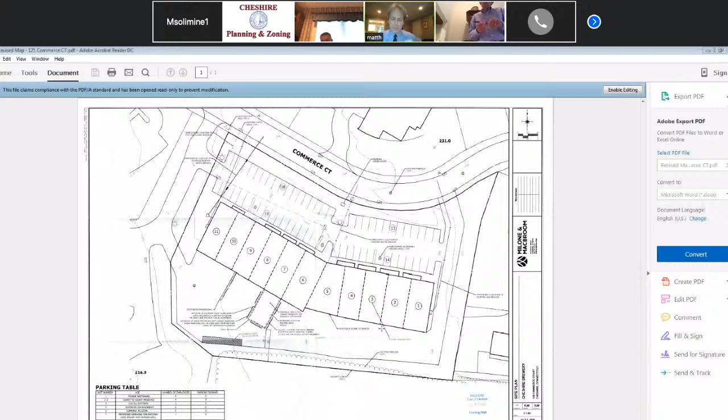In other words, our parking demand will be more focused on the hours of 2 to 10, generally on weekends, and then later on weeknights. So it's not anticipated that we're going to have much conflicting parking demand concerns at the premises.

That being said, we've sought to work with Mike Kozlowski and CFD, as well as staff, to accommodate any concerns with respect to the location of the food truck and the access to the rear of those neighboring units, while keeping the patrons in an appropriately safe location to the rear of the unit itself. So with that, it's probably a good time to have Ryan walk through the site plan, which is not very complicated, and make ourselves available for any questions the commission may have.

Thank you, Matt. Can everybody hear me? Okay, thank you. For the record, my name is Ryan McAvoy. I'm a licensed professional engineer with Milone & MacBroom.

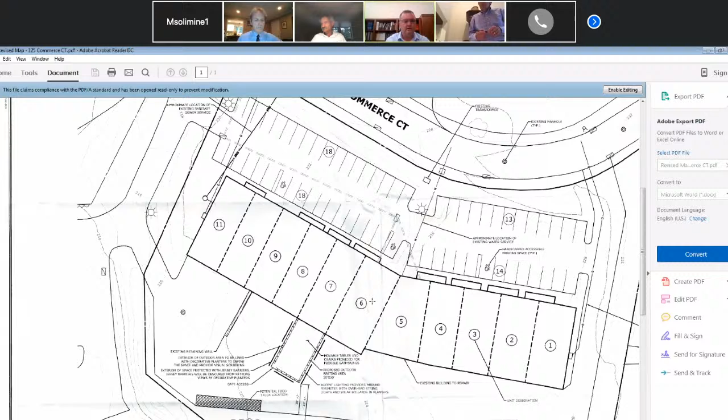Very briefly, the site plan that you have in front of you — essentially the goal is to maintain and use the existing parking area in the front of the building. This particular building on the south side of Commerce Court, just off of Highland Ave, contains 11 units, most of which are occupied right now by industrial or quasi-industrial office space. On our site plan, we provided a parking table demonstrating the parking demand for the other uses within the building currently, and we also calculated the demand for parking for the brewery, assuming the requirements of a restaurant. This may not exactly meet the definition of a restaurant, but it's the closest category in the zoning regulations that we can apply to this site.

The unit that they're looking to occupy is number 7, located in the western portion of the property. The indoor space will be approximately 1,200 square feet of indoor seating area, and the remainder of the space will be dedicated to the brewing operation.

The outdoor seating area, shown to the rear of the building, is approximately 30 feet by 50 feet in size, which will leave substantial space to the rear of the seating area for vehicular travel — some 28 feet in width. It will not obstruct the ability for any box trucks or similar vehicles to circulate around the back of the parking lot or make deliveries to the respective units.

The area will be protected with Jersey barriers on the exterior and mobile planter units on the inside, with gated access out to the food truck area. The food truck area is shown just as an example of where the food trucks can go. We do not want to encourage the food trucks to be in the parking area so that there's no conflict with this business and their patrons or other businesses.

The food truck area is completely mobile — these will all be vehicles. The outdoor seating area will have essentially no permanent site improvements associated with it. Things can be relocated or shifted very quickly if need be, but it is designed in a manner to provide safety from any vehicles that may be in the back of that building during patron use, although we don't anticipate that's going to be a very frequent occurrence.

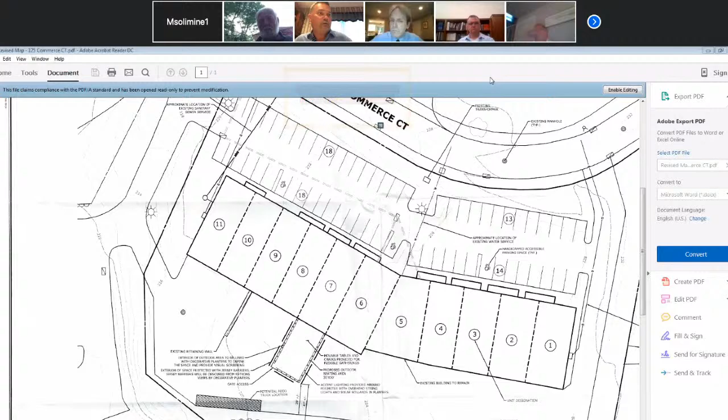Moving on, number 2, special permit application of Brodash Copper Ridge LLC, accessory apartment. The special permit application of Brodash Copper Ridge LLC, care of Anthony J. Fazzone Esquire, Fazzone Ryan and Ricciuti LLC, 2 Town Center, Cheshire, Connecticut, to establish an accessory apartment at property located at 11 Copper Valley Court, Cheshire, Connecticut, as shown on Assessor's Map number 29, lot number 151, in an R40 zone. Packet information is available on the town website homepage under Documents Distributed or Displayed during virtual meetings.

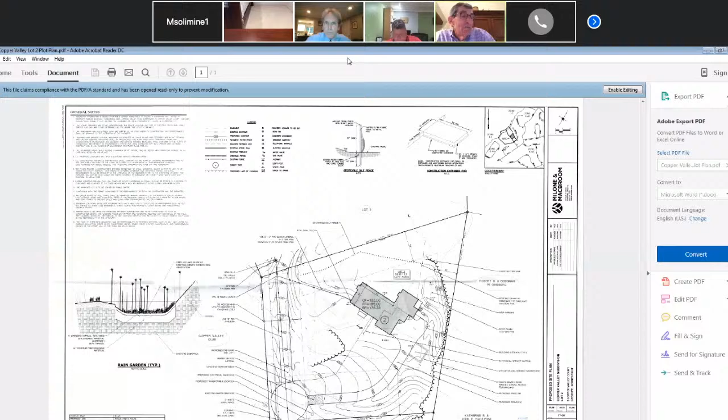Thank you. And representing the applicant tonight? Yes, Anthony Fazzone, with office here in Cheshire. I think the staff report pretty much summarizes this whole application. This is new construction, so it's very easy for the applicant to comply with the regulations. In fact, this is basically for a single parent, one of the owners' individual parent, and it's only 600 square feet. It has two private entrances and is connected to the rest of the house. As Mr. Voelker's memo points out, it complies in all respects to the accessory apartment section of the regulations.

Okay, thank you. Any questions or comments from commission members on this application? Woody Dawson: pretty self-explanatory, yeah, this is a pretty good one. Chairman, if I may, I do have to read comments into the record.

This is dated July 2nd, 2020, 11 Copper Valley Court. The fire department has reviewed the above application for the planning and zoning process. We recommend the following common stipulations: if this application is approved, code compliance plans must be submitted to the building official and fire marshal's office prior to construction. And one, a fire alarm system shall be installed so that occupants of both dwelling units are notified of a smoke or fire condition in the other. That's it, Mr. Chairman, no other comments.

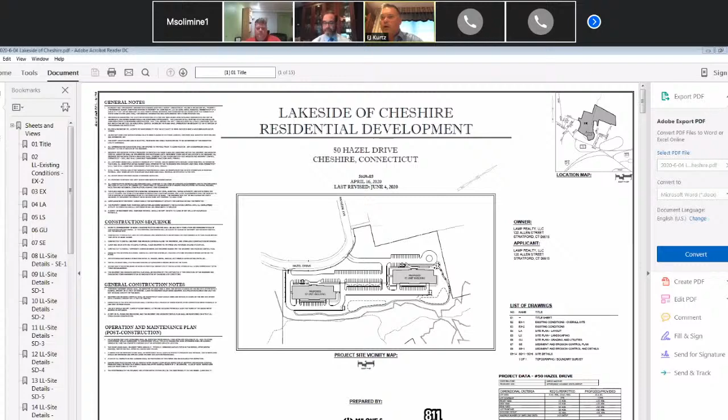Okay, Mr. Williams, you're all set. Thank you. Good evening, Mr. Chairman and commission members. I just want to start off saying, Mr. Chairman, I agree with what you said at the outset. I and my team would all like to be with you all in person as well. We appreciate you conducting the hearing in this fashion, and everything I've seen the town of Cheshire doing in wetlands and zoning has complied completely with the governor's executive orders. So we thank you for that. My name is Joe Williams.

I am a land use and environmental attorney of 25 years with the law firm of Shipman and Goodwin on Church Street in New Haven, and I am pleased to be presenting these applications to you this evening. With me on the call, and who you will hear from, are Tony Nazardo, a representative of the applicant and owner, Lamp Realty LLC, Ryan McAvoy, who you saw earlier and know well, our civil engineer with Milone and MacBroom, John Pruitt, our architect, and Dave Sullivan, our traffic engineer with Milone and MacBroom.

We're bringing these applications forward in an effort to work with this commission to implement the vision you established in your affordable housing regulation a year ago, to create more housing in the town of Cheshire affordable to moderate income households, and make a positive enhancement to the housing stock in Cheshire. We believe our Lakeside of Cheshire proposal at 50 Hazel Drive will do exactly that. First thing I'd like to do, Mr. Chairman, is turn it over to Tony Nazardo to introduce himself to the commission, give you the perspective of the owner and developer and his vision for the development, and then I'll come back with more of an overview on the application.

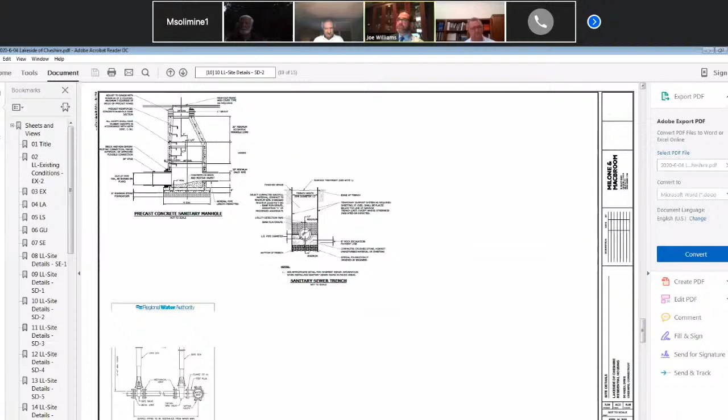Bill, there's one, there's 3 of them listed in a row. There was the existing conditions and the landscaping. Yeah, and the grading. Sure I have it, yeah, okay, but I'm not sure I have it ready to post up, so. Okay, well you can just go to the landscaping sheet, sheet 4 in the set. One more down. Yes. One more down. Right there. One more down, hold on. No, one more down. That, okay.

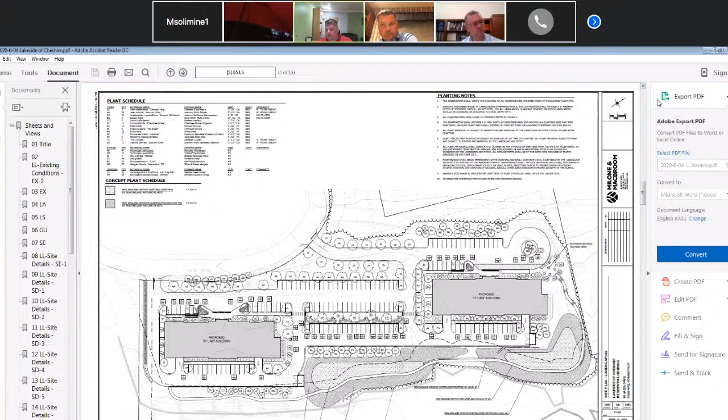We had this argument, we had a lot of discussions on it last year, and it passed unanimously for the 2 parking spaces. Well, I think there's a distinction, perhaps I would argue, between what is required by zoning in terms of the parking spaces provided and the discretion that's afforded to you for deferred parking spaces.

Now, deferred parking spaces - we're not suggesting that they would never be built. We're suggesting that, in general and based on data, based on the unit matrix we have of primarily studios and 1-bedroom apartments, that a ratio of 1.6 per unit would be more than adequate for what we need on the site. Should that not be the case 5, 10, 15 years down the road, and there is an issue with parking, those spaces could be built in a fairly straightforward manner.

But what we're trying to do is limit, I would suggest based on the data we have, unnecessary parking spaces - spaces that we don't believe are necessary to support the development in a reasonable way. We're not suggesting we don't have to do them if there were an issue. It's the whole purpose of the deferred parking spaces, to show how it could be built, which I believe we've done, but demonstrate that perhaps they're not necessary at this time.

Again, I think we'll agree to disagree on that one. When we passed the regulations recently, last year, it passed unanimously because of the conditions and other developments in town.

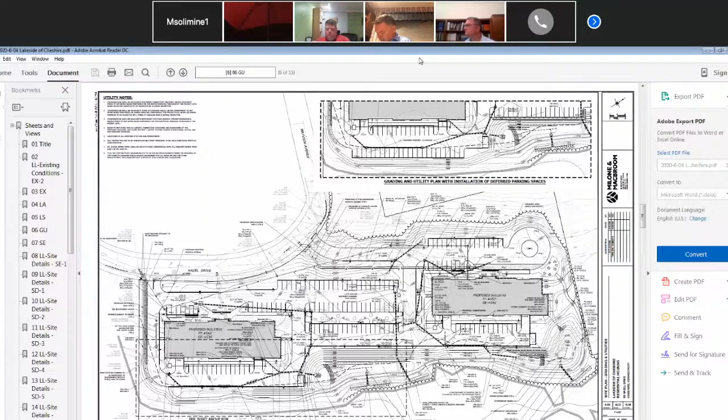Do you have an architectural rendering of the building? I couldn't find one, but that's actually the next portion of our presentation. It is available - if anybody wants to look at it, it's on the town website under documents available for the virtual meetings. Under Planning and Zoning Commission and the 50 Hazel Drive heading, there are architectural plans listed. If you click on that, you'll see the most up-to-date rendering we've submitted. We also included some in our package.

Thank you. Any other questions for Ryan? Okay, John Pruitt, the architect, now. Are we ready? Can everybody hear me? Yes, we can. For the record, my name is John Pruitt. I am the owner and principal of John Pruitt Jr. AIA Architect. My firm is located in Guilford, Connecticut.

We have in front of us a proposal to construct 2 identical buildings. Each building is 3 to 4 stories in height. The west facade, facing Hazel Drive, is 3 stories. The buildings are built into the site, and the rear perspective shows a 4-story elevation.

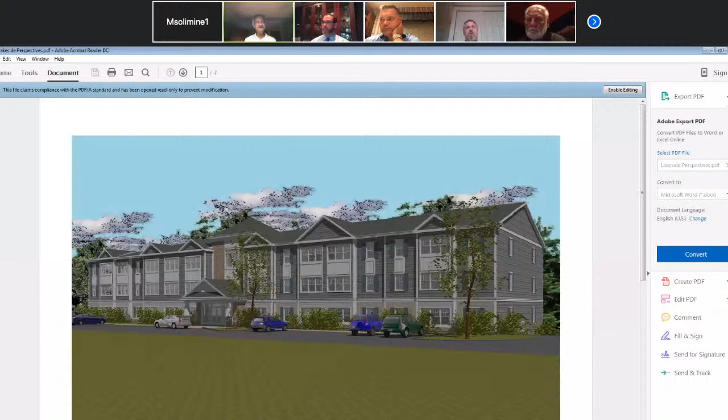My question is on the fully enclosed garage, is there any kind of ventilation that's running 24/7 or not for carbon monoxide and other exhaust fumes down there? Code does require both mechanical and natural ventilation. The rear perspective and the rear elevation shows ventilation, but because the garage is fully enclosed, we have to provide mechanical ventilation. And this will show on the mechanical drawings that we submit to the building department.

Thank you. EJ, Mr. Bowman.

Ryan McAvoy said that the new building's approximately 6,000 square feet of roof area less than the original drawings, but that was a flat roof. With your pitched roof, could you give us, not tonight, but the difference in square footage of roof area of what is there and what you're proposing? I would say that there's maybe 10 to 15% more roof area in these buildings than there would be if this were a flat roof. Could you do a calculation for us though, because we don't have the construction drawings here and we can't do them ourselves. The difference between a 5 and a 4 pitch is going to change that square footage also. So if you could get that calculation for us, I would certainly appreciate it.

I could possibly be of some help with that. And your sprinkler system, is this under a residential or a commercial design? The sprinkler system that would be proposed would be according to the requirements of NFPA 13.

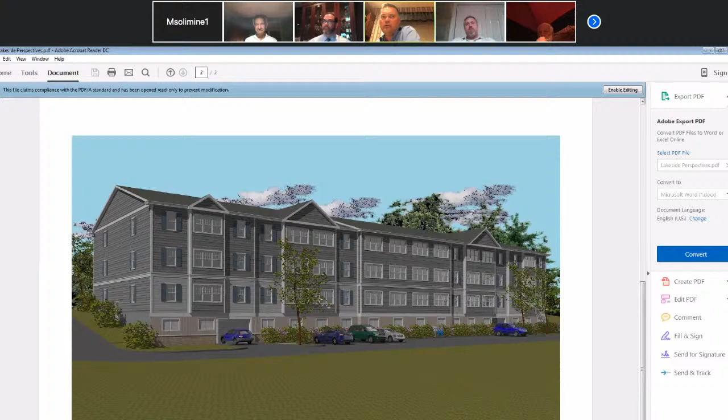Evening. Bill, will you be putting the slides up? I'm going to try, I wasn't able to load everything, so. You there? Okay, yeah, yes, I'm here. They're on the website, Bill, under the one that says traffic impact study, near the end of the list for this. Yeah, I know that, but it didn't come up as easily as we wanted it to when I was trying to load it all this afternoon, so. Go ahead, Dave, you start. I'll see what I can do, okay?

So just for the record, my name is David Sullivan. I'm the manager of the Traffic and Transportation Planning Group at Milone & MacBroom. We were happy to take this assignment where we did a traffic impact study, and as you'll see, we did a little bit of parking analysis, which I'll get to as well.

We also did, which was a large part of our assignment here, was there was a number of comments, both staff level from the police department, for example, and a number from the public. So I'll try to address those and have that as part of my presentation here as well.

So the first slide would just tell you that our traditional traffic impact study is an evaluation of what the existing conditions are in the environs of a site, and then we look at what the future conditions would be and what impact the development that we're studying would have on those future conditions. The difference between the conditions with and without the development at some point in the future is essentially what the traffic impact is.

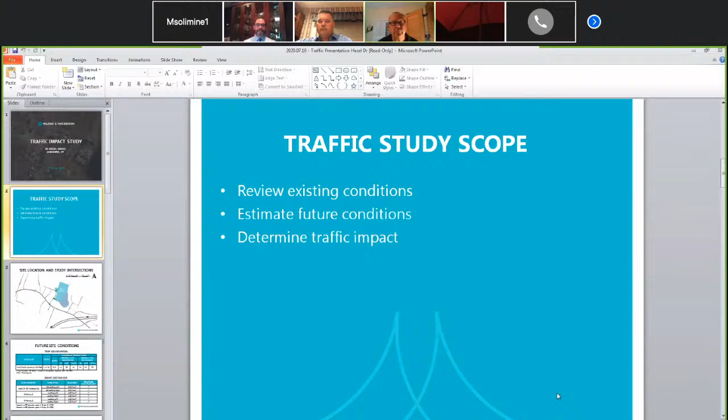There was a number of comments that had gone through your staff, and we had access to reading them. Some of the important things about that statistical information—oh, there we go, we are on slide 4, Bill. I'll get there. Right there, there we go.

So the top part of that is the trip generation findings, which I just talked about. But what's important on the trip generation to also understand is that traffic is not just generated during that 1 hour. What these numbers represent is the number of trips that would be generated for the 1 peak hour during the peak commuter period. So for example, in the afternoon, while there may be 50 trips, let's say from 4:30 to 5:30, that doesn't mean there are no more peak hour trips. There are trips that come the hour before, trips that come the hour later. This is just the highest of those hours of travel.

And why might somebody say 114 units have only 50 trips, for example? Well, people have different patterns. People have different reasons for traveling at that time.

The traditional thing everybody thinks about is someone working a 9-to-5 job coming home during the PM peak hour. But some people work retail and are leaving at that time, or work shift work and get out at 3:30, or are going in at 3:30 or 7 o'clock. All those statistical factors come into play in determining which numbers you should evaluate during that heaviest peak hour.

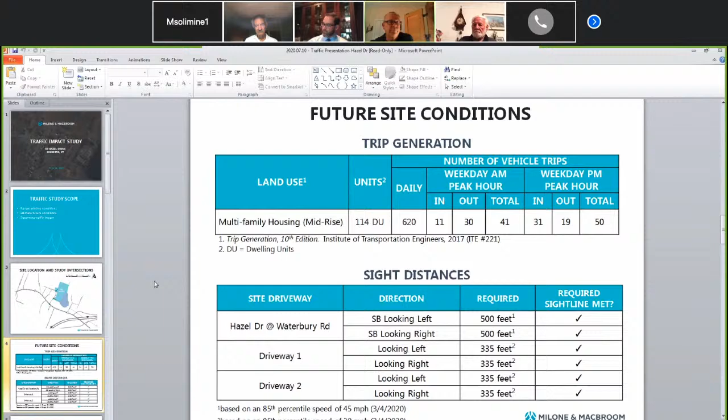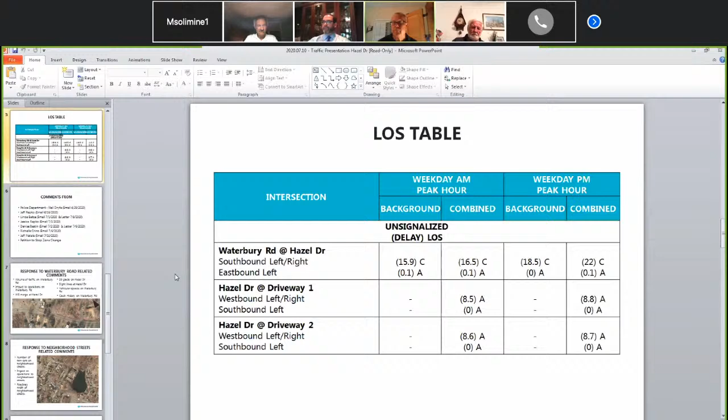Okay, now I'll go into the comments. There was quite a litany of comments, and we went through them all. Some of them we had specific responses for.

What we tried to do for tonight, I prepared a letter which was submitted on Friday. There was a lot of common themes as we went through - different items, whether it was an email, letter, or comment letter, and there's a petition in there as well to stop the zone change. This is what we reviewed. There was some additional information that we reviewed this morning that came in, and it wouldn't change what we have in this presentation, because a lot of common themes were repeated throughout.

So we tried to take the common themes and address them here. We have more details on all of these common themes in our actual letter from last Friday, but I'll go through them one by one here, at a higher level, and drill down as anybody needs. So next slide, Bill.

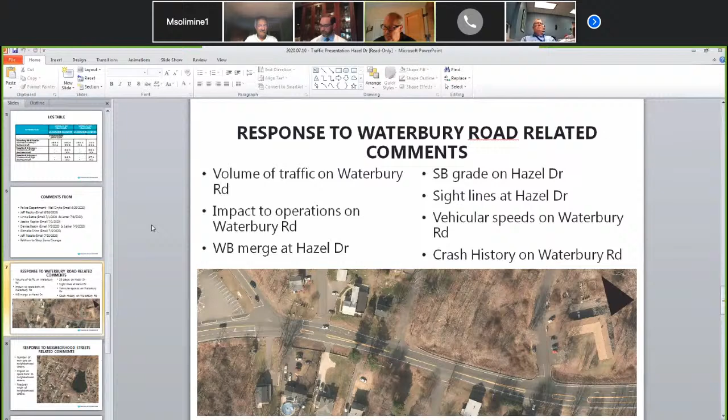We have the sight lines and the speeds we talked about, and I just covered the crash history. So to summarize, there was a lot of narrative about what's happening on Route 70, Route 801, Waterbury Road, and we acknowledge some of these things. We do note them, and we will work with DOT to see if any suggestions we may have, they would entertain.

The next category, if you go to the next one, is there was a number of comments having to do with the impacts on neighborhood streets, in particular Mayview Avenue and Hillside Avenue, and I think more so Mayview Avenue. The types of comments we were hearing: the number of new cars on their streets, the impact on operations, the width of the streets our traffic is going to be on, things of that nature.

So in summary, I won't get too far into this, but we document it more. When we generate the traffic, or determine the amount of traffic that's going to be generated by a development, our next step is to determine where it's going to be routed onto the roadways. To do that routing, we rely on a couple of things: we look at traffic volumes in the area, but more importantly, we look at census data on where people are coming and going from. Those two sources give us a pretty good idea.

So what we anticipate is most of the traffic that leaves this site is going to take a left when they get to Waterbury Road, heading toward the interchange, and most of it's going to be coming from the interchange. All of those trips are going to be using Hazel Drive, invariably. There's no reason you'd go a block or two out of your way to take a left turn at an intersection that's inferior to Hazel Drive. Hazel Drive has a little bit of a grade as you approach, but it's maintained, has good sight lines, and has some paint striping to give a bit of an island refuge. So it's a far superior street to take a left turn from. Certainly nobody would take a left anywhere else.

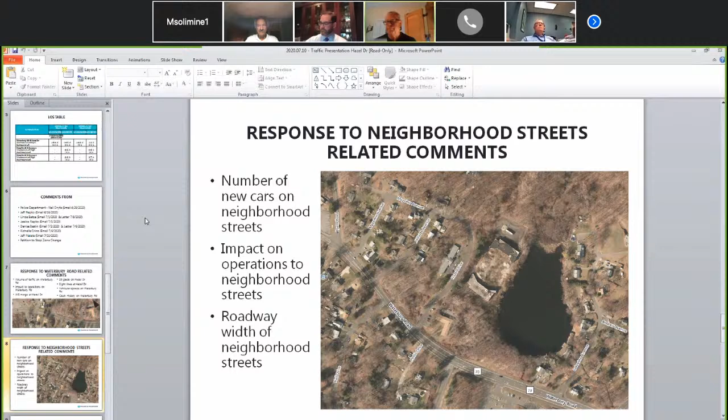We kind of combined these other two, I'll call it. One was the site traffic estimates. That came up a lot. I addressed it earlier in the main presentation, but not only did it come up a lot in the comments and the emails received, but it comes up a lot in my life, in all of these hearings. Unfortunately, I do too many of these hearings, and that comes up a lot. It's a concept that's not obvious initially - why there would be 114 of something and it's only generating 50 cars.

The other comparison, or false equivalency, is the number of parking spaces to the number of trips. They're really mutually exclusive because it's really not the parking spaces that are generating traffic, but the people that live in the apartments. So I won't explain that again, other than to say it's a common comment, and hopefully I've explained it well enough. In the written response, I think I even go into a little more detail.

School buses, pedestrian environment - it was mentioned a little bit. I agree with Ryan, and I think it was Commissioner Nazardo who mentioned that there should be a connection from the internal sidewalk to the crosswalk and the external sidewalk. I agree, and I think Ryan identified a good spot where we could put that connection so that we have a consistent pedestrian network, which gets back to the school buses and the school analyses.

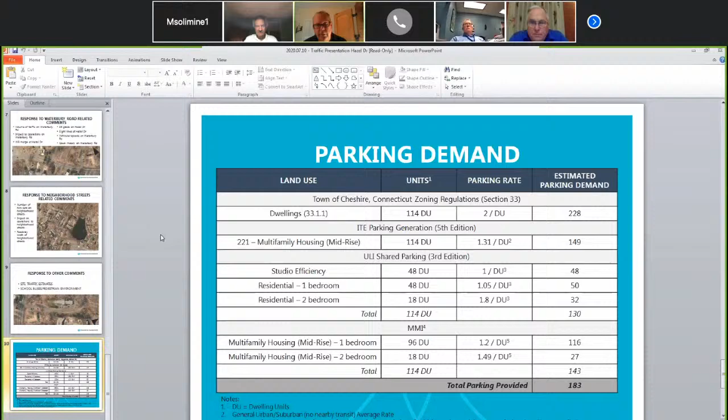We just tried to summarize some of the information we have. Philosophically, I think this is a great opportunity - traffic engineers historically have not been the most environmentally sensitive people in the world, widening roads and things like that, but those times have changed. And a big part of what I do now is how can you safely accommodate all modes of traffic and do that with the smallest footprint as you can.

And one of the easiest ways to do that is either shared parking or deferred parking, because many times you don't need all the parking that's developed. So if we look at your regulations at 2 per unit, that's probably a good solid per-unit number for a more traditional mix of units where you have 1s, 2s, and 3s. In this particular case, you have such a high percentage of efficiencies and 1-bedrooms - there's 48 efficiencies, studio efficiencies, and 48 1-bedroom, and only 18 2-bedroom. So it's really skewed to the smaller units.

The first thing we looked at was the ITE parking generation, which is a per-unit number without regard to the size of the units.

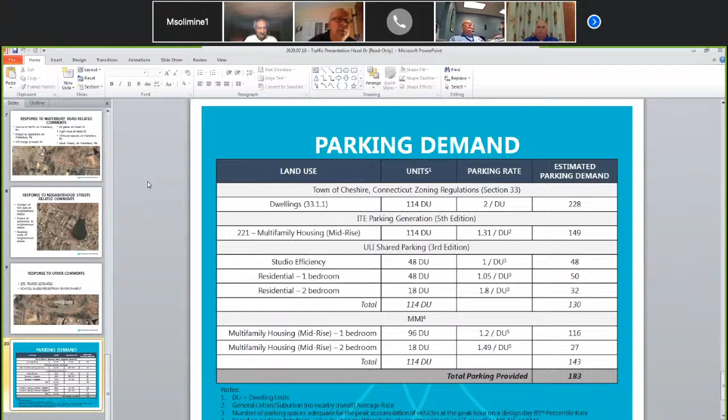So full disclosure, I've been up there a bunch of times. I wanted to see at different times of the day what the traffic patterns were and everything else. And again, for full disclosure, I made a couple recommendations through planning and zoning. The apartment complex, as soon as you drive in on the right, where the sidewalk is under leaves and everything, they do use that for overflow parking.

I think I should probably look at something along those lines if we're going to add a whole bunch of cars there. Bill and I talked about that, he's going to bring that up.

Also, in both reports, including the traffic study, it says the state DOT is responsible for the brush or overgrowth on both sides. And one of the things I brought up too is you have 2 property owners that own corner lots, and per our regulations, they're responsible for the sight lines there. So that's something else I wanted to bring up and disclose.

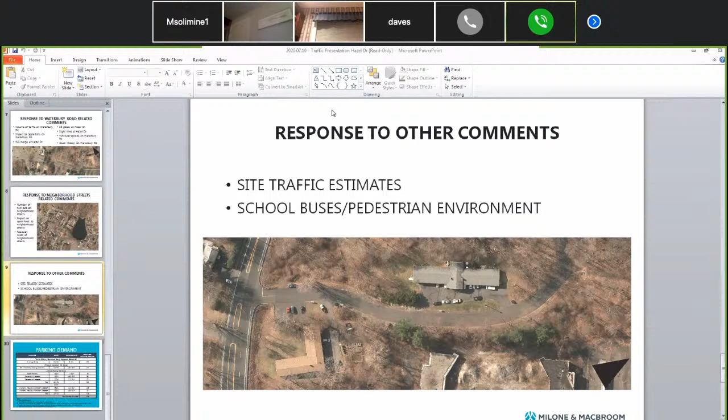Comment received from Kathleen Caitlin, dated July 1st, 2020: A concept for multi-family housing has been presented for the west side of Larson Pond on Hazel Drive, adjacent to Waterbury Road. For the reasons below, this is a bad idea. 2 buildings providing 114 housing units would require a zone change and severely impact Cheshire's open space. In recent years, the town purchased land to provide open space for hiking and dog walking. The area is larger than the sign at the entrance, but the entire area still feels like someone else's backyard.

What about the bears? More desperate animals will put more people at risk on the Bear Highway. COVID conveniently keeps us in a closed-door Planning and Zoning Board meeting, but increasing the population density by 114 will increase the COVID threat. Please reconsider this zoning change. Sincerely, Michael and Kathy Caitlin.

A comment from Rochelle Crino, sent July 6th, 2020.

Good evening. I'm emailing to ask for your support in opposing the proposal for a 114-unit apartment complex in my small, quiet neighborhood off Hazel Drive. I ask that you seriously consider the size and scope of this proposal. A development half the proposed size would be a much better fit for the area. Below, I have outlined my concerns about and reasons to oppose a development of this size and scope in this particular area of Cheshire. The proposed development is too grand for the neighborhood to safely sustain it. Thank you.